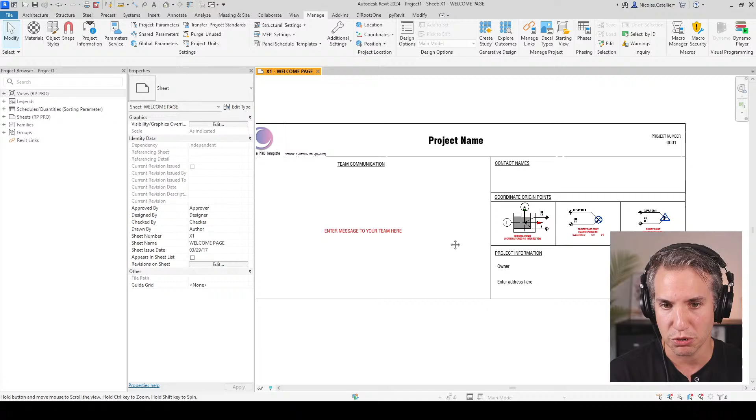So I'm going to switch between the slides to Revit. This is a Revit project that I've just created by using the Pro template. This is the first sheet that you will see. So I'm assuming most of you know, but there's a tool over here that is the starting view.

And if I use this, I set it to sheet X1. I use kind of a random sheet number, X, and it's called welcome page. This contains the project name, the project number. You can write a message to your team. You can include many other things as well. But something interesting that is quite unique to the Pro template, and something you should consider...

I don't know about you, but coordinates can be extremely confusing, isn't it? Everything I've written about coordinates has been among the most popular content on Revit Pure website. And I realized people are really confused and they don't know where the points are. They don't know where the points should be.

So what I've done, I've created a view for each of the main coordinate origin points. There's the internal origin over there, the project base point, and the survey point. I'm not going to explain the difference between all of these points. You can search for it on Revit Pure website or on YouTube. You will find some content I did in the past that's going to get into it.

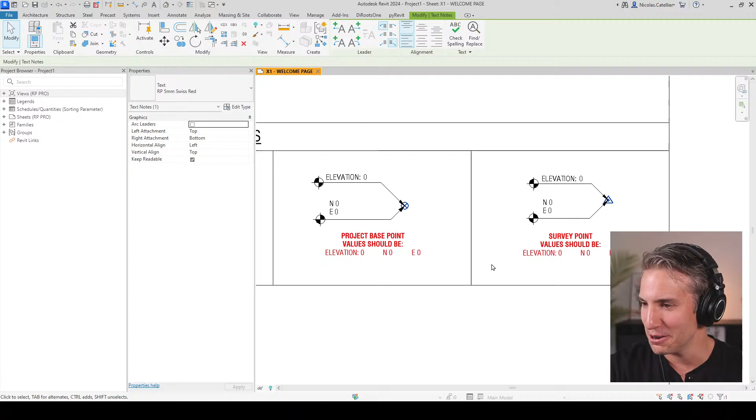But in this case, I write a text explaining where the point should be. In this case, the internal origin should be located at grid A and 1 intersection. And there I can see that the internal origin is at the correct place.

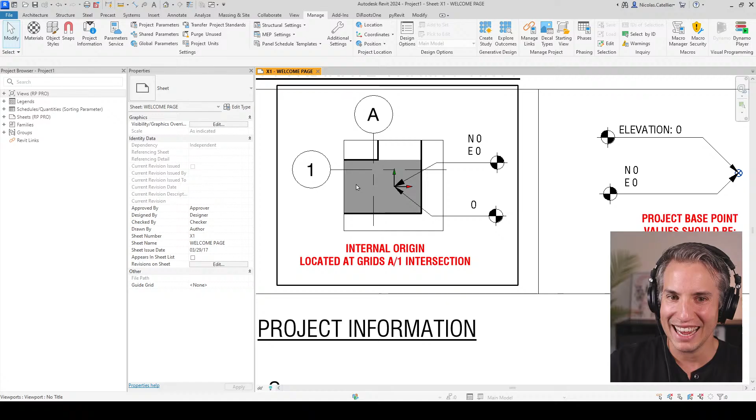So, for instance, if I was to open the project and I would see something like this, it would mean there's something wrong because the red text indicates the position that should be, but the view indicates something else. So to me, as a BIM manager, that would be a red flag that something is going on with the coordinates, and maybe somebody moved the grids or the project has been moved away, something like that. In theory, the internal origin cannot be moved.

When it comes to the project base point, same thing. So I indicate the values that should be 0, 0, 0, and same thing for the survey point. So these are just views to keep track of the coordinate points in the project, because it's very easy—people are not sure where it should be placed. And also for me, it's a reminder to people, hey, think about this. You need to think about where these points should be.

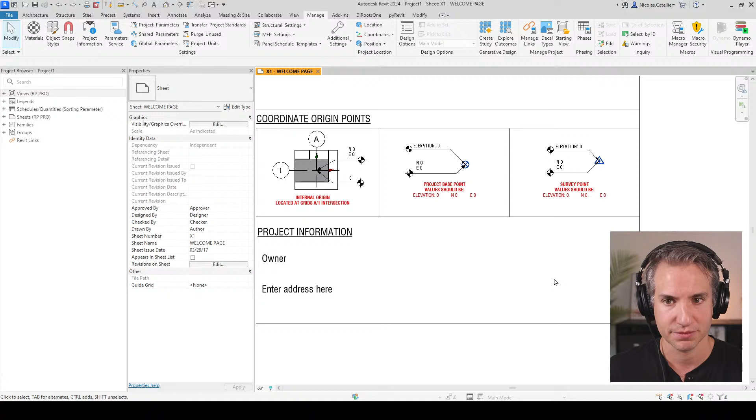For those who don't know, typically the internal origin is going to be—if you link a CAD file, for example—this is going to be used as the 0, 0, 0 origin for the CAD, by default at least.

A few comments about the origin, but sometimes grids move as part of design. How do you deal with that? That's a good point, Ermin - you have to take that into consideration. If that's the case, I would just say that the BIM manager needs to be aware that maybe the internal origin is not at the exact same position as it used to be, and then you can update the text. But the point is that people know where the point is and where it should be. That's just knowledge, and it's the most important part. If the internal origin is not exactly the grid intersection, maybe it's not a big deal, but people should at least know it, so if they export or try to link files together, they won't have any bad surprises.

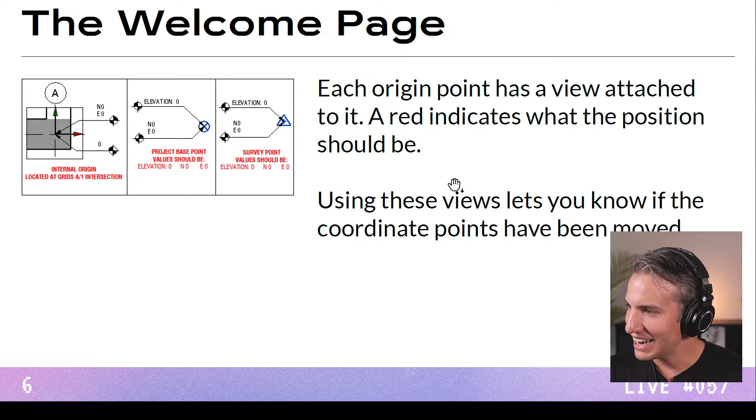I have a lot to cover. Okay, so one of the main topics I wanted to talk about is the project browser. There are so many ways you can organize the project browser. I would say one of the most common techniques is to have an organizing parameter. I know a lot of firms are working this way, and this is the way that we've used to work at the firms I used to work with, by using an organizing parameter.

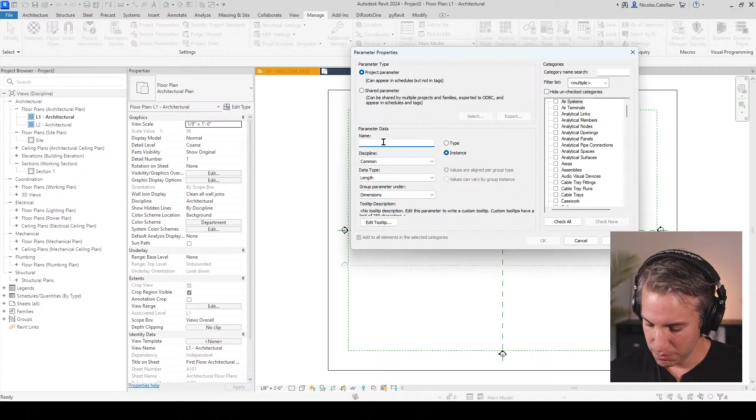Let me explain what I mean exactly by that. So if I create a new Revit project, in this case I might use the default Autodesk template, the new one that they've released with Revit 2024. Let's say that I want to organize the views differently. I can go to the Manage tab, go to Project Parameters, create a new parameter, and I'll call it Sorting Parameter - you could call it something else. And then I will include the views, and it's going to be by instance.

And then each view in the project will have this sorting parameter, and I recommend typing a number. So for example, here I can type in 01 for CDs. You can have concept, you can have worksheets. You can decide how you want to name them.

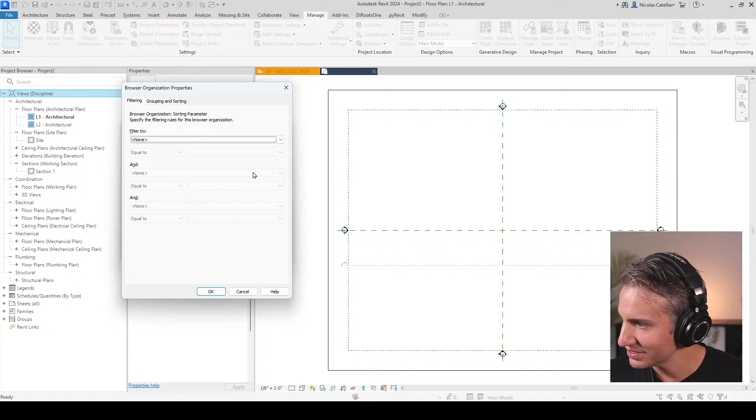And then I have to right click over here and select browser organization, and I will create a new scheme to apply to the project browser by clicking on new. I will call this sorting parameter. And then ignore filtering - if you use any filtering, it means some of the views in the project will not be visible in there. And here in grouping and sorting, I will group by the sorting parameter, and then I will use family and type, and I will click on OK.

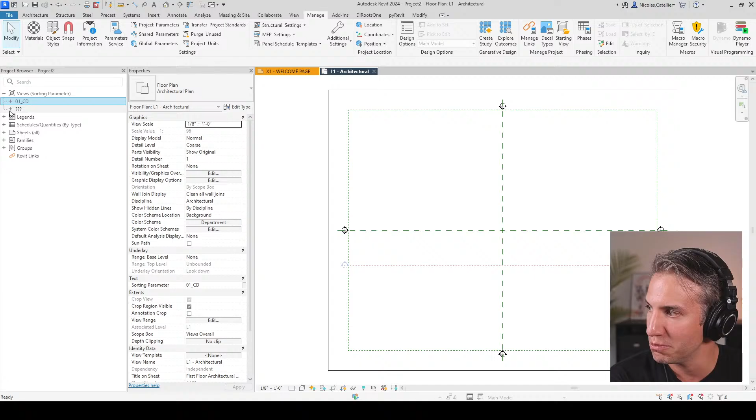And then when you're finished, make sure to check the box to include the sorting parameter. So you can see what happens - the views that I've added the sorting parameters to are correctly classified in 01, CD. However, any views that are not correctly classified are going to be in the question marks, which quite frankly can be pretty annoying. But this can be solved by using view templates that you assign to the views, and automatically the sorting parameters will be correct, and you should avoid most of the question marks. But in my experience, by using this sorting scheme, I always ended up having question marks, which is extremely annoying.

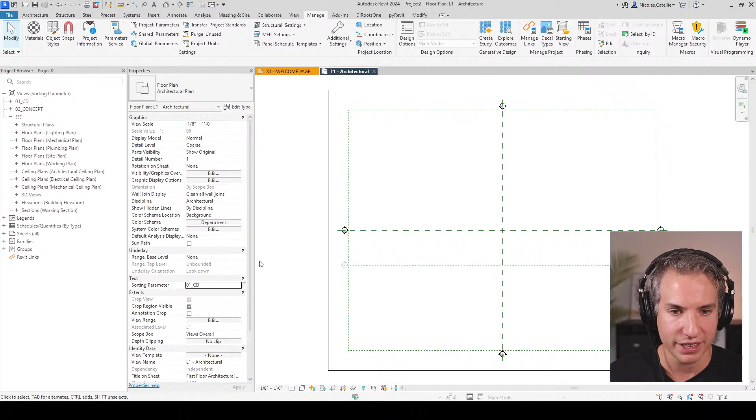But anyway, anytime I would change the sorting parameter to something else, let's say this is 02 concept - I recommend using numbers so that they're placed in the order that you want. You see that they're now classified like this. So this is a decent way of doing it. I know a lot of firms are using this. You can add multiple sorting parameters, especially for bigger firms that might have multiple disciplines. You can organize quite a lot with this.

So this is one way to organize, but I am proposing to you the way I do it in the Revit Pure Pro template is different. I've experimented so much to find a great way to organize the views in the project browser.

And the different way is using the view types. What that means is that each view in Revit has a view type assigned.

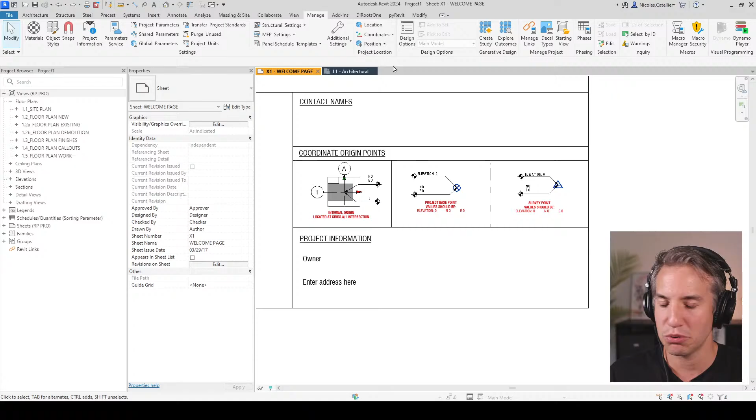So going back to Revit, you can see this is the Pro template, already created. But if I use the default Revit template, you can see that floor plan has multiple views. For example, this one is called architectural plan, so I can switch to lighting plan, mechanical plan, plumbing. But the way I've decided to do it in the Pro template, in this version, only has views for architecture, doesn't have electrical and so on.

Let's say I go to this and click on the drop-down menu. You can see every single kind of view I've created in the project browser. To accomplish this, you select one of the views, click on edit type like you would for a family, click on duplicate, and you can create a new type of view. This one is going to be called 1.8 test plan, and I use the number for the order that I want the views to be organized.

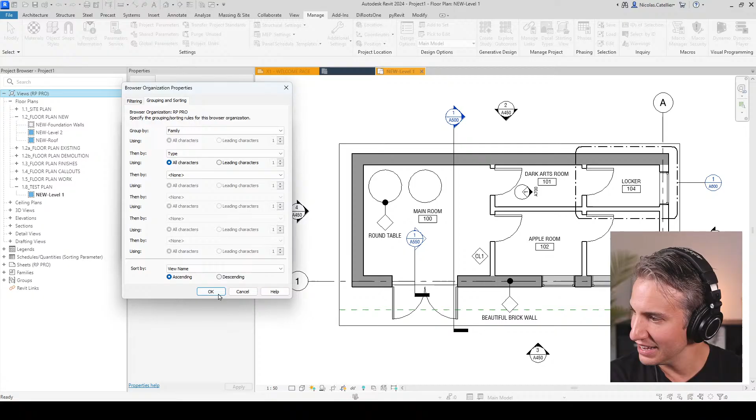Like this, you can see this view is added to 1.8. If I go to the project browser organization scheme, it's called RP Pro, and I click on edit, I go to grouping and sorting. The way I sort views, first you set it by family, then by type. That creates this result where the first level is floor plans, ceiling plans, 3D views, elevations, sections, detail views, and drafting views. The second level is the type, so the different categories of plans, for example.

I've experimented so much with different ways of organizing the project browser, and this is by far my favorite method. There are never any question marks. It works very well, and there are other advantages as well that I'm going to show. I'll be curious in the comments how you organize your project browser, and if you think this could work for you.

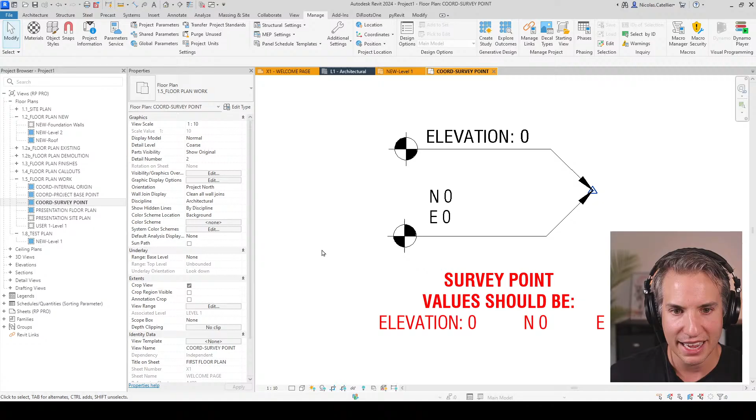So it was a question about the welcome page. Yes, each of these are views. For example, they are classified in 1.5 work. You can see there are views called coord - coord internal origin, coord project base point, and coord survey point, where only this element is visible and everything else is turned off. It's just kind of a view to track these specific points.

Also, the point of this, if I send my model to a consultant, like an engineer, they can open the model and with the welcome page, they'll know immediately where my points are placed. They don't have to mess around to find the points.

Yeah, so a lot of people mention using sorting parameters already coded in all view templates, view types needed. Yeah, that's definitely a good way. If you're going to use the technique, the sorting parameter, you absolutely need to use view templates, else you're going to have question marks. But even then, with my experience, you just need one user that might remove the view template and you will still get those pesky question marks.

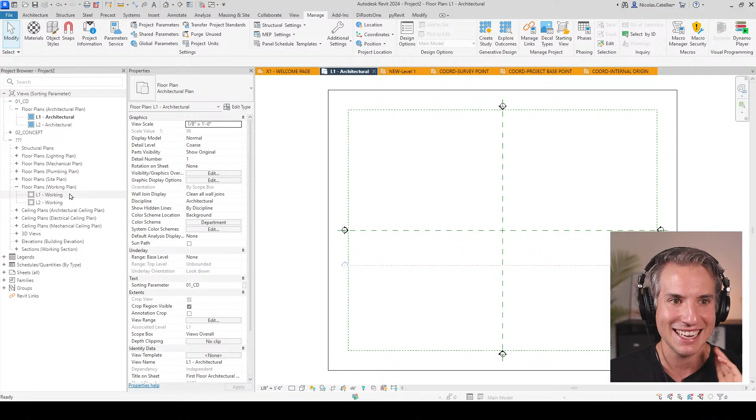So if you think you can avoid them and it's working well for you, I've seen many firms use this technique and it's great, so you don't have to change the way you're working. But if you haven't considered it, I would say personally, the view type technique works really well. Highly recommended.

All right, so you can see all of the views placed. I've created types for every kind. I'm going to talk about phasing later. So there are never any question marks in this.

And something else that I really like about this is that any working views - so if John creates a temporary view to work on the model - the workflow is to place it on 1.5 floor plan work, where all temporary views or work views that are not meant to be placed on the sheet can be placed there.

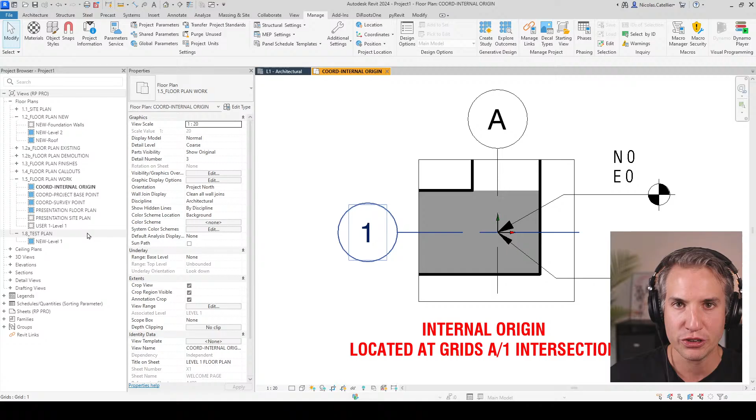And so I usually recommend that the users should type their name as well in the view name, so we can know if it's an important view. And I think it's in Revit 2023 that they introduced this icon to know if it's placed on the sheet or not. It's easy to know, when you clean a model, if you can delete the view or not.

Okay, now let's talk about organizing sheets. Going back over here.

So the way that I do it, and I recommend, typically, at least as an architect, I might have a set of plans for the CDs, execution documents, and then I might have another set of plans for the city, for example, for permitting, or where I might have a colored elevation or a colored plan view. And these typically are placed in C - I like to use the C letter. And everything that is internal will be placed in X.

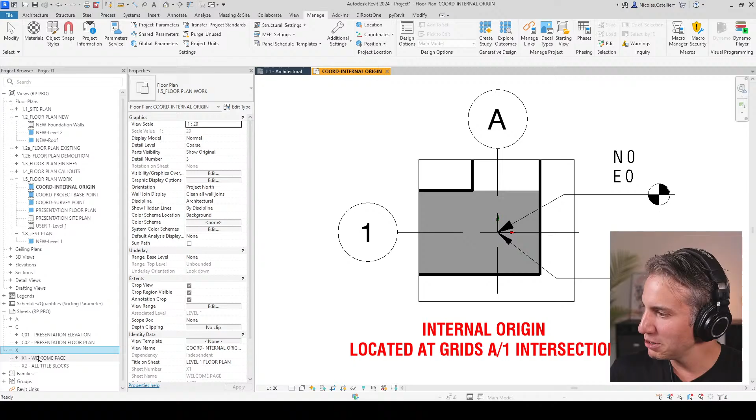In this case, I have the welcome page, and I also have a sheet where all the title blocks are placed so I can visualize them. So this is all internal. You could have additional sheets as well. And everything in C, let's have a look. For example, I have a presentation elevation and a presentation floor plan, in letter format or 11 by 17 probably, so more meant for presentation than CDs.

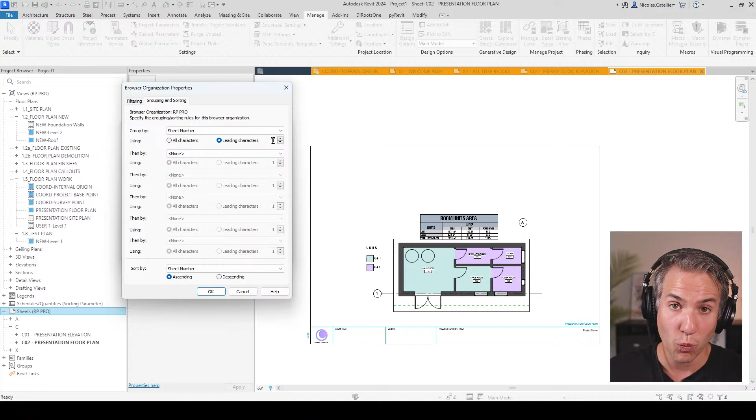And the way the project browser is organized, let's go to sheets, let's edit this. I'm using the sheet number, but with this trick of activating the box that says leading character, and I set it to 1. This means it will use the first character of the sheet number, so in this case it's A, C, or X, and it's going to group the sheets by that, then in ascending order. So if I go over here, you can see all the sheets in A, all the sheets in C, and all the sheets in X.

This avoids me - I know another popular technique is using, again, a sorting parameter. But if you don't have a sorting parameter for one of the sheets, you're going to get those pesky question marks that are so annoying. So once again, for this, I recommend using the leading characters number 1 to organize your sheets.

Having a look at the chat: do you have any option to solve the broken leader after export to AutoCAD? I don't know about this. If anyone has a solution for this, let me know.

Do you assign view templates to new views with your view types? Yes, we're coming to that soon.

All right, now let's talk about schedules. So far I said that I don't like sorting parameters that much. Schedules are the exception. For schedules, I didn't really find a better way of doing it. And usually there are fewer schedules than there are views, so it's not that big of a deal, and it works pretty well to use a sorting parameter.

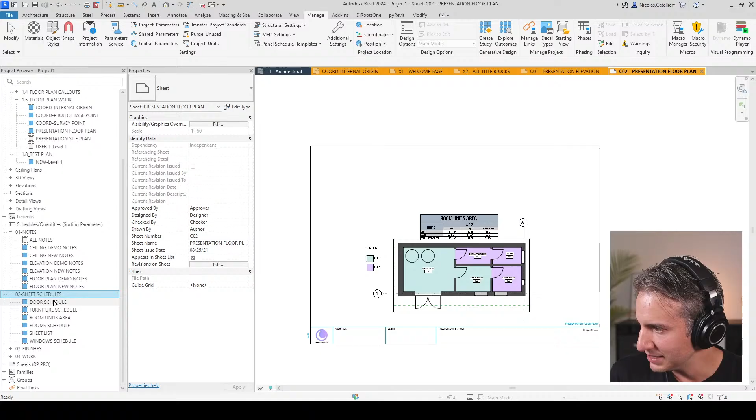In this case, you can see the 4 categories that I've organized: I have notes for all the plan notes that I have, I have sheet schedules - schedules that are meant to be placed on sheets, like the door schedule, the furniture schedule, and so on - then I have the finishes, including the exterior finish legend and the interior finish legend as well. If we have some time, we can come back to explain the way I create these. These are material takeoffs that I use as legends for the project.

And then number 4 are the work schedules. So what is a work schedule? A work schedule is a schedule that is not meant to be placed on a sheet. It's meant to be kept internally.

You can see a live session I did with Purvi Irwin, I think it's episode number 4, where she discussed this - I got really inspired by what she did.

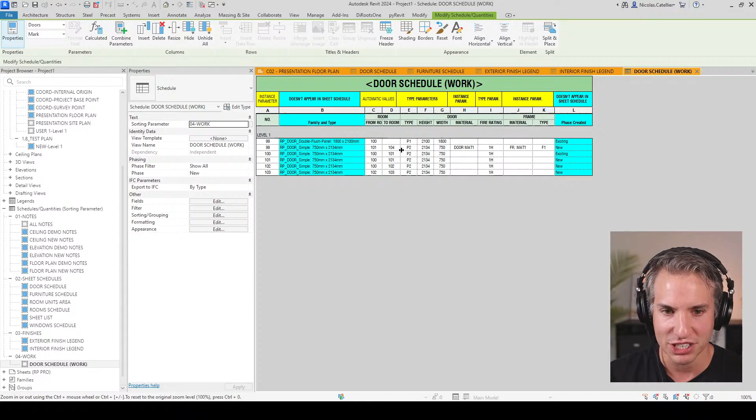The idea is everything in blue here, all the columns in blue, are only internal. So if I was to go to the door schedule as it's placed on the sheet, you can see that these specific columns don't appear. It's just for internal use, maybe for quality control, to verify that the model is healthy and nothing is wrong.

And so once again, if I check the browser organization for the schedules, I am using the sorting parameter, which I've mentioned I don't like using very much for views and sheets, but for schedules it works pretty great, I would say.

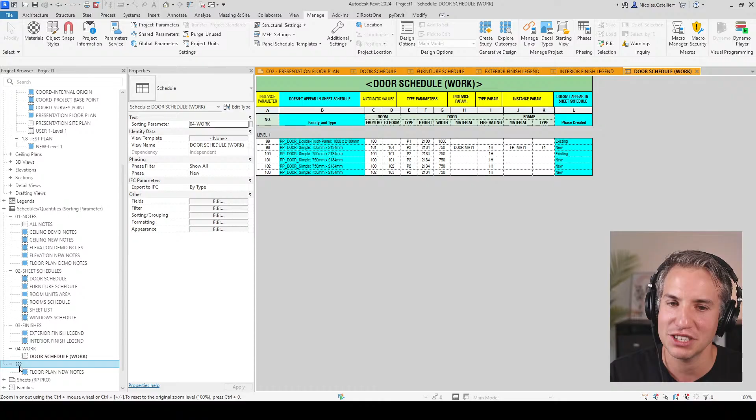Maybe you will still get these question marks - for example, if I remove the sorting parameter, I do get these annoying question marks. But schedules, you typically - yeah, you can have a lot of schedules, but typically it's a little easier to classify and fix this than on views, where there can be so many views.

A comment from Joshua says: remember that episode I implemented working schedules in our template after that stream. Yes, Purvi is so good with schedules, so many good tricks from her. I recommend checking out episode number 4.

All right, let's keep going.

It's really important to set up naming standards for your views and to include it in your BIM protocol. I could do a whole other episode about how to create a great BIM protocol PDF document, or these days it can be online using tools such as Notion, SharePoint, whatever cloud tool you're using.

I really like to name the views in a consistent way. For example, floor plans new will just be the name of the level. Then existing, I'll add prefix EX with a dash, demolition DEM with a dash. And the 3D views, I usually have a number, then dash 3D, then a description. So I have that for every single view in the project.

If I go back to the Revit project, you can see the way views are named. Let me open all of this. There's a very consistent way of naming.

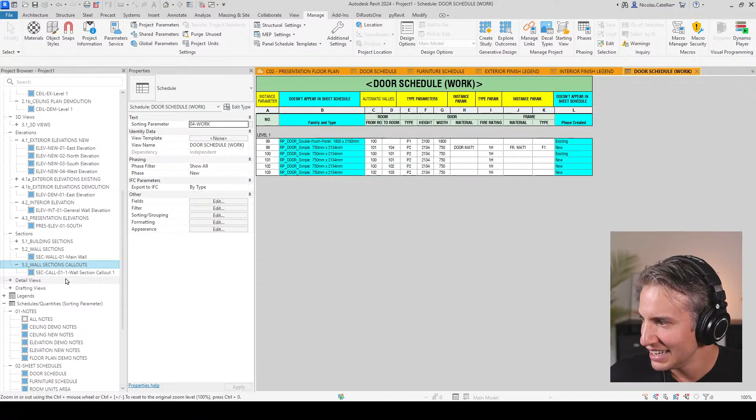For example, ceiling will have CEIL dash, and then the phasing: new, existing, or dem. Same thing for the elevation. And for example, if I'm going to the detailing, I have my wall sections, which are SEC-wall01. And if this is a callout that has been created from this one, I would call it 01-1, referring to the main wall section. Anyway, it's really important to think deeply about how to organize your project browser.

I did post a meme on LinkedIn about it. Do I have it? Let me show you.

Because I'm sure many of you have opened Revit projects, had a look at the project browser, and thought, what the hell is going on? It's impossible to find what you're looking for. And to me, when I open a project and see a messy project browser, it's the first sign that something is really wrong with the model, and it's probably not very well managed.

Let me show you that little meme over here. There you go. I'm sure many of you saw that, like copy one, copy one, copy one, copy one. I even saw people creating new view types with completely bogus titles, such as fake ceilings for tags, or don't delete, or don't use, or anything like that. This doesn't seem to be very well thought out.

To be honest, I did have one project where I remember losing control a little bit, and very quickly it's like weeds: if you don't take care of it quickly enough, you can completely lose control. Two weeks later, the entire project is like this. So if you have your project browser in order in the first place, things are much more likely to go well for you. So think about this.

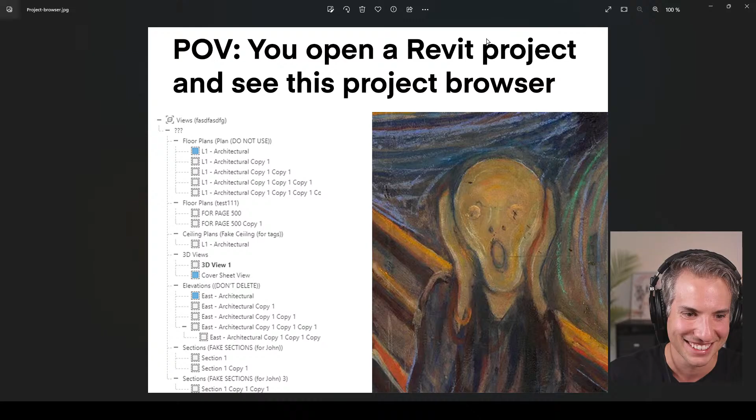I'm sure all of you saw something like that at some point, right? So yeah, is there anything else for the project browser?

Not necessarily project browser per se, but let's scroll down. Also, naming families is extremely important. Let's open a few of them. So I have a code, typically the name of the company. In this case, RP for Revit Pure, underscore PRL for profile. Each kind of family has a 3-letter code, so PRL for profile, underscore again, then a short description of the family using a dash.

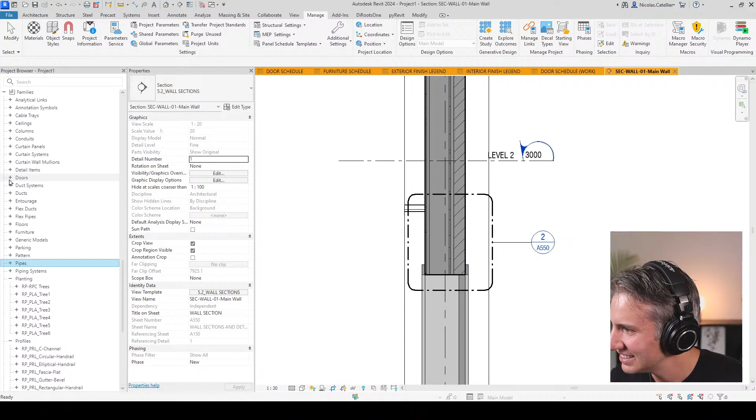I don't like seeing spaces in my family names. Every single time, I'm sure it's possible in the template—there are a couple with spaces, or maybe not. So you can see, 3-letter codes; it can be 4 sometimes for doors, and that's not a big deal, or 2 letters in the case of detailing.

So try to think of a naming convention, or if you do get this template, you can just reuse the system.

I'll have a quick look at the chat. There's a lot of questions, so it's possible—sorry if I don't get to answer all of them.

Always go from general to detail. This applies from family naming to material naming.

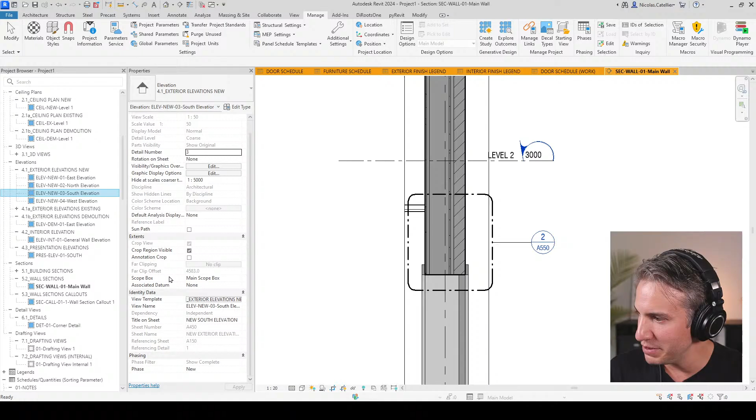William asks, why is it important to name the reference view to where it's coming from if that information is already shown in the properties? William, that's a great question. I like that you can get a glimpse of the project just by looking at the project browser, even without clicking into the view itself. That's why, for example, I like to type 'new' in the name of the view, even though people could look at the phase and determine by themselves if it's new, existing, or demo. But to me, I like that you can look at the project browser and know immediately what's going on. So I know I can look at this callout and know it has been created from this section, if users did their job properly.

Agustina said the first copy one sets the tone and opens the door for more copy ones to come. Yeah, sure. Like if you start to have copy one, it's like weeds, and more are going to come in the project.

Are you using the number at the beginning of your view type for your sheet nomenclature? No, the number at the beginning of the view type is there because I want the views to be ordered properly. Since it's in ascending order, 2.1 is first, 2.1a is second, and 2.1b is third. So I typically want the new to be first, the existing after, and the demolition last. The numbering allows me to control exactly the order things show up in.

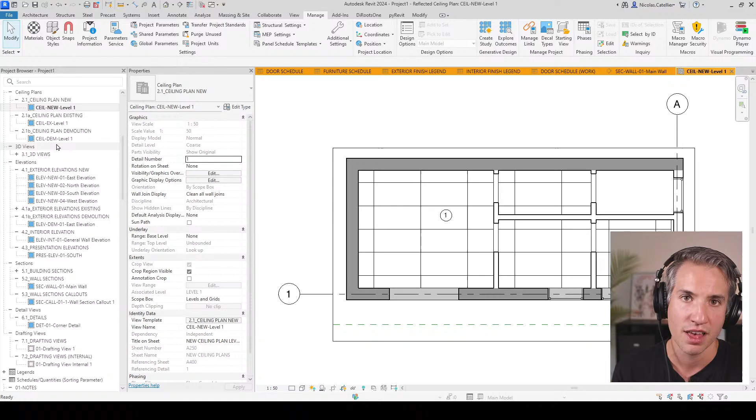Tintalk asks why spaces are wrong. I think it's not that big of a deal today. It comes from very old standards where having spaces could potentially create problems, so I've always kept that in mind. Honestly, maybe someone else could answer better, maybe it's just an OCD thing to not have spaces in family names. All right, let's keep going.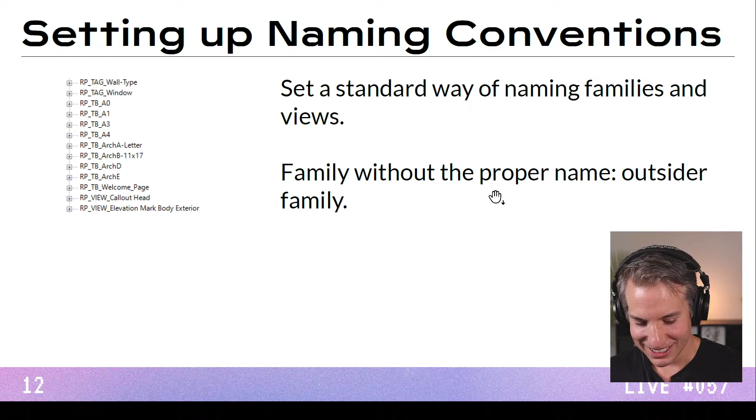I deliberately started with the project browser because to me it's the base. Often when I see a project that's disorganized, it's because the project browser is a mess and they didn't have a good system to start with. If you have that, chances are on your side, and of course you need to do maintenance and explain to users how to use it. The view types, for me, are kind of self-explanatory, you don't have that much explaining to do.

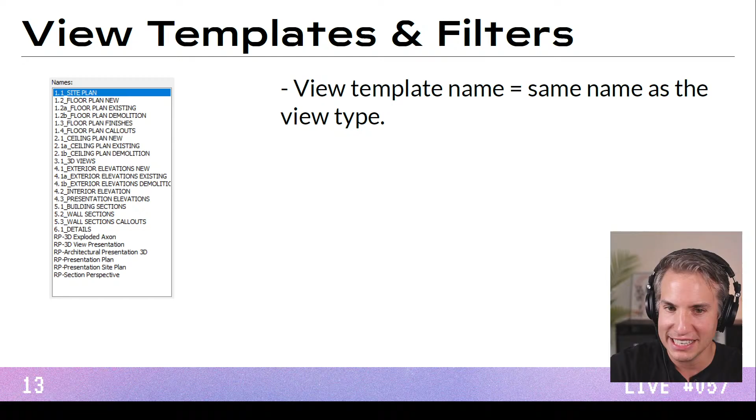Okay, now let's talk about view templates and filters. What I like about the view type technique is that I use the exact same name as the view types for the view templates, with a few exceptions at the bottom. But for the CDs, construction documents, it's the exact same name. Let me show you exactly what I mean by that.

Let's say that I have ceiling new level 1, and you can see that the view template name is exactly the same, same number. To me it's extremely simple: this view type, 2.1b ceiling plan demolition, has this view template assigned, and that's it. So users won't be confused.

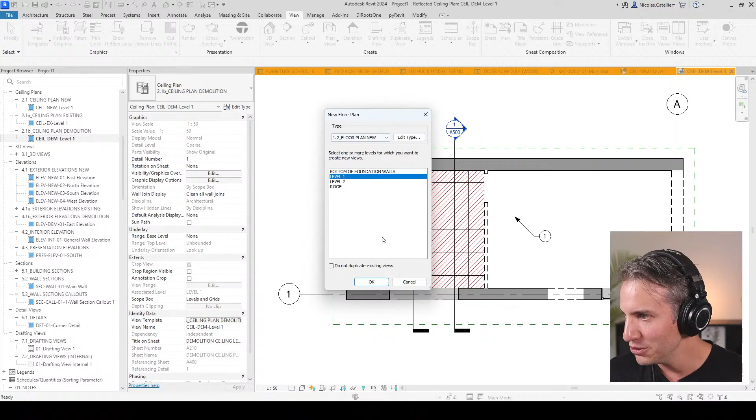So which view template should go with each view type? It's super simple. If I create a new plan view from level 1, and I use existing, which one should I use? Well, let's say demolition.

So it's been created here, and you can see automatically the correct view template has been assigned, with the exact same name as the view type. I'm just a fan of simplicity generally speaking, I like how simple it is to have a view type and the view template with the exact same name.

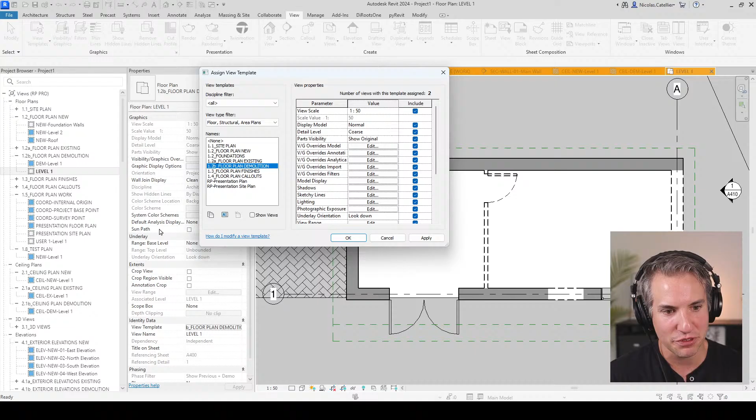Having a look at the chat, many people are explaining why to avoid spaces in naming conventions. For example, Nicholas Wright says BIM 360 doc folders will not be accessible if you include a space at the end of the name. Interesting. Yeah, I think it's just good practice. Me too, I've heard it's very specific circumstances that could cause a bug, but just because of that, it's good practice to avoid it in the first place.

Okay, so that's for the view templates, at least how to name them. Now let's talk about filters. Filters are powerful and often underused from what I see in a lot of templates, and that's the difference between an amazing template and an okay one.

So these are the filters that I have for my main floor plan view. I mostly use filters to make some elements invisible. In this case, I make the demolition views invisible, the site floors invisible, the presentation views—because all these views starting with C, I have a filter so all the C views are not visible in the CD plans—and the finishes for the walls and floors.

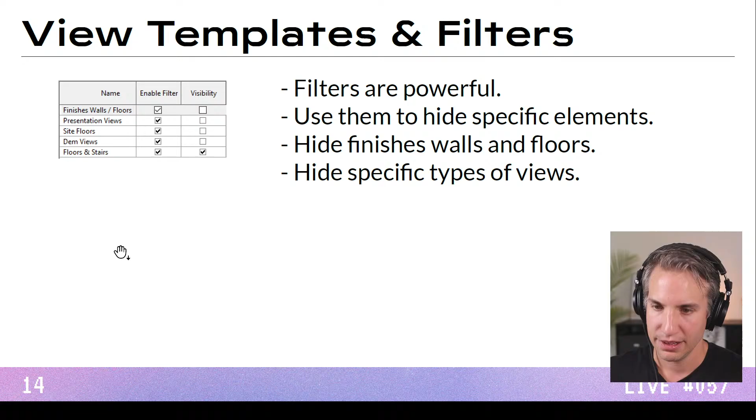Something else that I like to set up in the template is the scope boxes. I try to set them for every single view. I'm assuming most of you have an idea of what a scope box is; if not, I have a pamphlet PDF guide about it and a YouTube tutorial you can search for. We can see in this case I have a couple of scope boxes: this one is called main scope box, and this one is levels and grids.

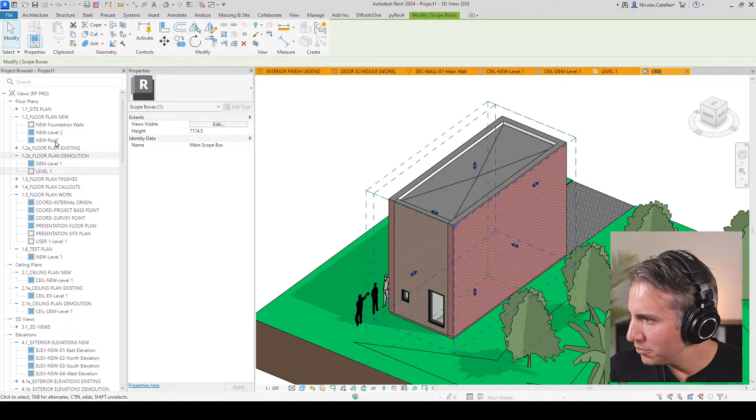So if I go to this one, you can see that the scope box has been assigned. Oh, why is it assigned to level and grid? It should be main scope box perhaps, or maybe levels and grids is fine in this case. If you have multiple views, you don't have to set the crop region every single time, it's automatically assigned to the scope box. You don't have to play around with it.

Tad asks, any reason why your origin is top right of plan? That's a great question, I remember having a few debates about this. Should it be top left, top right, bottom right, bottom left? I'll be curious if you let me know in the chat what you typically use. I've seen differences in all areas. I don't know if there's any norms or standards about this, what does ISO standard say, if it even mentions that.

An interesting comment from Liz Sinclair saying, I recommend using master format numbering for family naming. Yes, that's indeed a potential good way to do it.

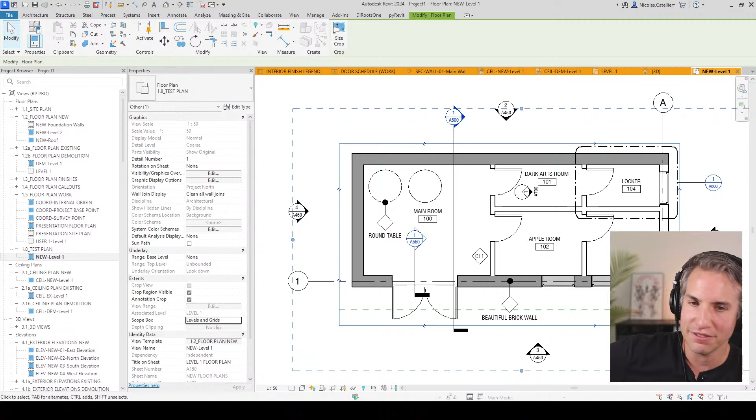Etsane asks, hey Nick, thank you for this presentation, is there the same template for Revit 2023 and 2022? Yes, this one goes back to Revit 2019 if I'm correct, so you have six versions of this template. Only in 2024 will you have access to things like the topo solid that has been placed, maybe a couple of fixes in the most recent version, but the core of it is pretty similar from one version to another.

So some people say bottom right, some people say bottom left for the origin, the grid at top left. So as you can see, everyone has their own way of placing the origin. Pretty interesting, let's keep on going.

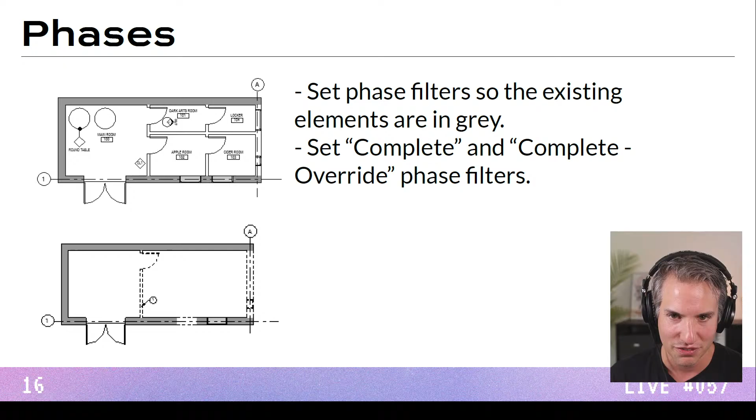Let's talk about phasing. I've been working on so many renovation projects, and it was always about how we organize the project browser for phasing, how we organize the new, the existing, and the demolition views. It turns out that having a view type for new, and a view type for existing and demolition, is the best way to do it. If you're working on a project that's not a renovation, you don't need views for the old phases, you can just select them and delete them and they'll be gone from the project browser.

You can even do a Dynamo script for that. There are some really great Dynamo startup scripts where you select your project type and check the box for renovation or new project, and all the renovation views are automatically deleted. Or you can do it manually, it's not that long either. In this case, we have phases for the floor plans, ceiling plans, and elevations, not really for the wall sections, although that might make sense to add as well.

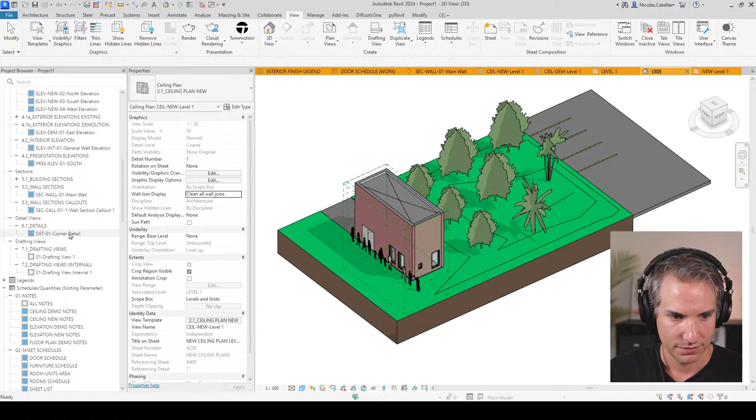Okay, that's for phasing. Now let's talk about the view filters. I don't like the default view filters, the phasing filters from the default template, so I did create my own.

For example, if I go in here, you can see this is an existing view. For some reason I do have some site elements showing up, that's okay. This is what I like existing to show up like, the walls will be shown in a solid gray color, and for example the windows, if it's not cut, I want to use a lighter gray color.

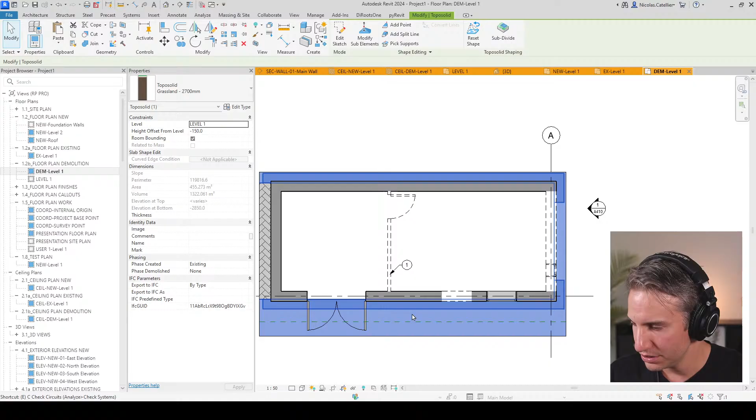Let's go to demolition, this is what I want. Let's hide this, okay, this is what I want my demolition plan to look like, to have nice dash lines and to also have all the existing walls showing up in gray.

And then for the new element, where is my new? Okay, here's my new. I want the existing walls to be shown in gray, solid gray like this, but I want the new elements to show up in white. Again, that's not something that's initially done by default on the default Autodesk template.

So in this one, I had to mess around a lot with the phase filter. Let me show you the phase filtering for this. I'm going to the phase, going to phase filters. So you can see a few examples.

I did create a phase filter called complete no override, for if, let's say, I want everything to show up in white. Let me remove the view template. I can switch from show complete to complete no override, and everything will just show up in white. So I guess it depends, for a renovation project typically I would want to use the other one, but it's possible that for some views you just want everything white like this.

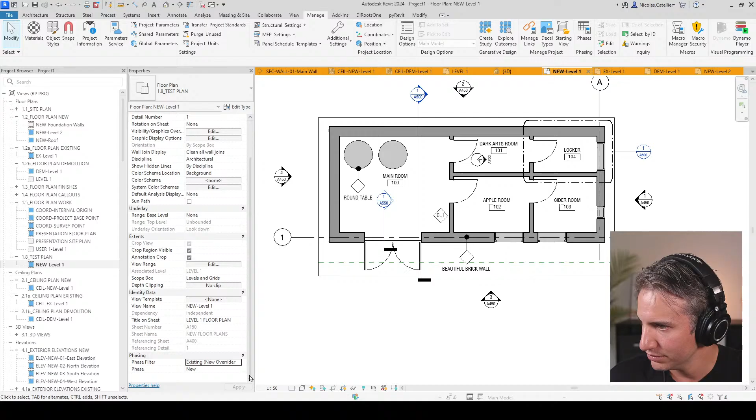If I go to existing, even though we're currently in the new phase, I still want them to show in gray. So I've created a phase filter that is existing new overridden, which means they're new in this phase, but not new in the context of the project.

If I have a look at the graphic overrides, I just have these cut patterns. And by the way, the cut patterns, the solid fill, I always place it in the background. So if there's a color in the foreground, a pattern, it's still going to show up.

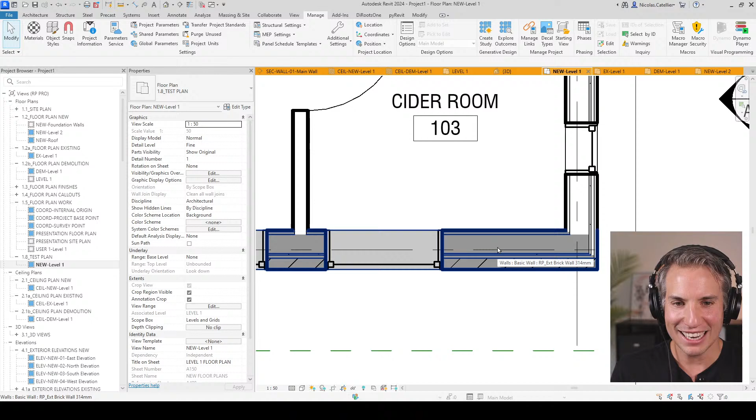Let me go back to this one. Is this a generic wall? Let me switch the level of detail to fine. This has been possible only since Revit 2019, by the way, but you can see all the layers of the walls with a gray background anyway, which you couldn't do in the past.

You had to manually draw a filled region, which was extremely boring, but now this is automatic. Just make sure to set override in the background and no override in the foreground.

I'm talking about the phasing over here. By the way, if you look on YouTube, I have another session where I geek out about phasing stuff like this, so I'm not going to go too deep into it now. Just know that I talked a lot about the best way to organize it.

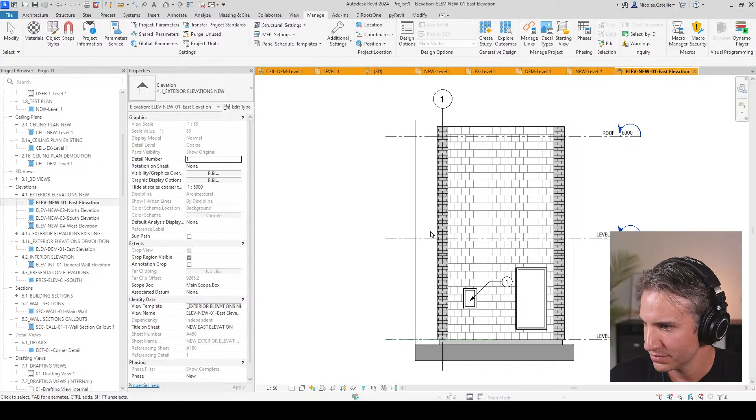If I look at the elevation as well, pretty much the same concept. For example, this is a new wall, so it's showing in white, but the brick walls are existing, so they're showing in gray. And existing elements, for example this window, are going to be showing up in dashed lines.

Okay, I would set the existing cut and project line as dark gray, so you differentiate between new and existing.

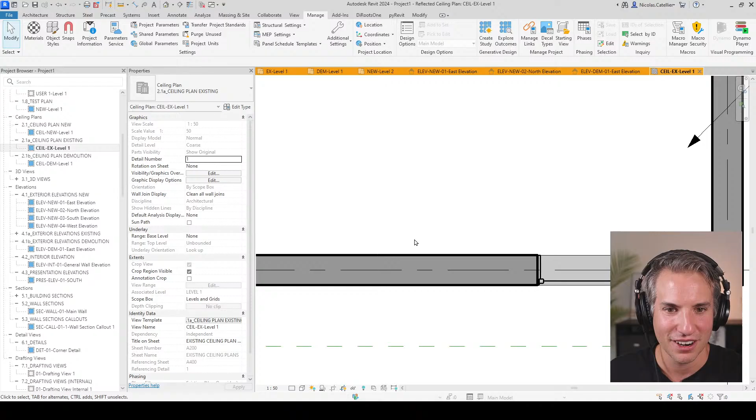Yeah, I don't know why, but I don't like when lines are a different color. It just looks weird to me, but to each their own, of course. So a solid gray is fine to me, I think this is pretty clear. I just like my black lines for the elements. But that's possible, maybe it looked good in the end. I like the way it looks.

By the way, in the Pro template, I've also played with the line weights. Something that could be controversial is I use the exact same thickness for all scales, which means I could basically delete the scale if I'm doing that anyway. Typically you'd have different thickness at different scale, but something I do like is knowing that line number 1 is going to be 0.1 millimeters anyway, regardless of the view scale. That's just something I enjoy, knowing that the thickness is the same everywhere.

Some people might say, well, in detailing, that's not enough, we want things to be a bit thicker. Yeah, all good, but I've played around with it and I've come to this one.

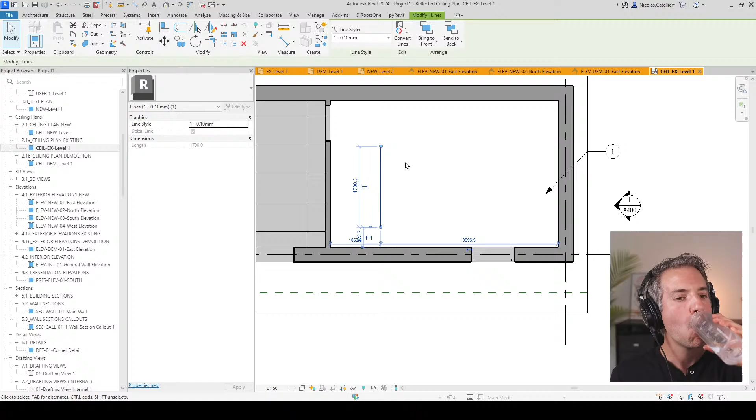So there are good discussions. Yes, CoreDX says you can delete all of the view scales. That's right, yeah, that's right. If you are going to use the same for all, you could just delete them and keep one scale. I think I kept them all so people could see it and could make changes if they wanted to.

There are discussions about phase mapping. Yeah, of course, if you have models from consultants, you need to do phase mapping. Again, I think it's something I talked about in the live session I did specifically about phasing. All right, let's keep on going.

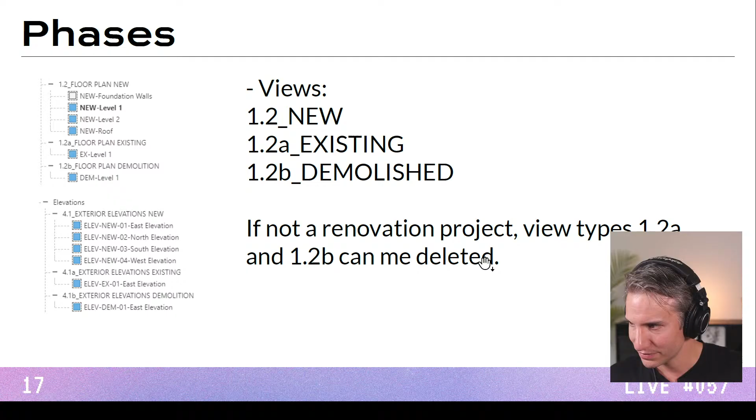Like naming the views, I will use the same number but add a letter to indicate existing or demolished: A for existing, B for demolished, and no letter for new. And if it's not a renovation project, you can just get rid of this.

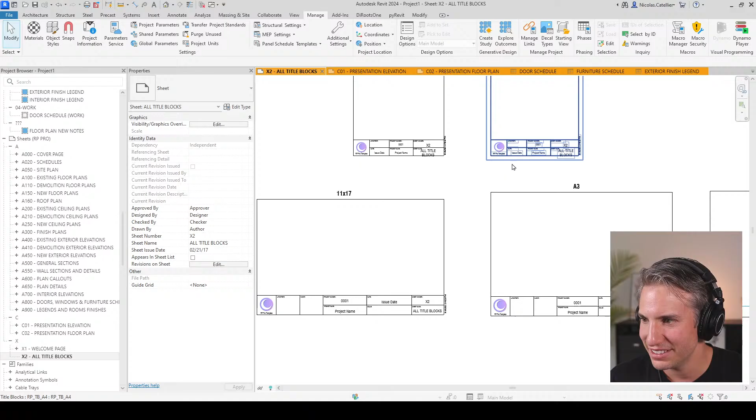Title blocks. Yeah, I do like to have my sheet over here. Where is it? Where is it? Sheet with all the title blocks placed, so you can see, and that does include both the European sheet sizes and the North American ones, so both letter and the A series.

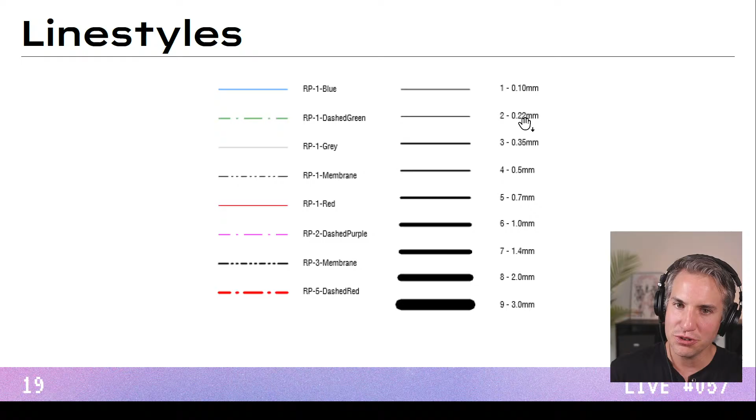Line styles, again, one of the reasons I like to use the same thickness for all scales. I like knowing that line number 2 is 0.22 millimeters. So if I have other line styles, I'll know how thick they are.

And I do actually include in the template, if I go to legends over here, not detailed component, template standard, this view where I include everything, all the components, all the samples, everything, and I have this line style over here. This is the way I name the view.

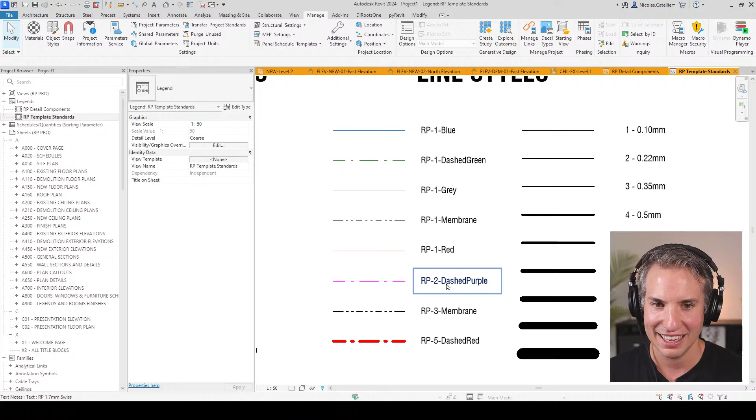First, I add a prefix for the company, RP in this case, dash, could be underscores as well if you want, and then this is the number of the thickness. So I know RP-2-dashed purple, that's the name of the line style. It's going to be a thickness of 0.22 millimeters. This is the best way I found.

If you want to see this in additional settings, line styles, you click on the plus and you can see every single one of them.

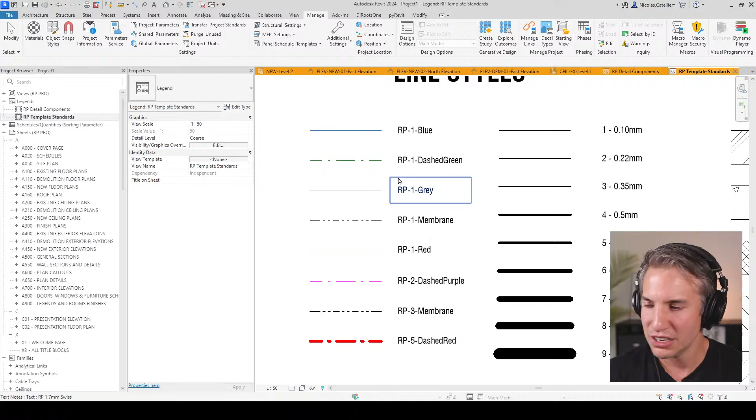The reason I'm using a prefix is because you always get random alien line styles in your project, and I want to know if they should be there or not. Often I will open a project and see a bunch of lines, and often if you've done a bad job, maybe it's because you've exploded a CAD file inside your Revit project and every single layer has a line style created with the same name. So having these lets me know that these are the really important line styles that I should always keep and not delete. Anything else might be a mistake and maybe I can delete them.

Having a look at the chat, people commenting about the title block.

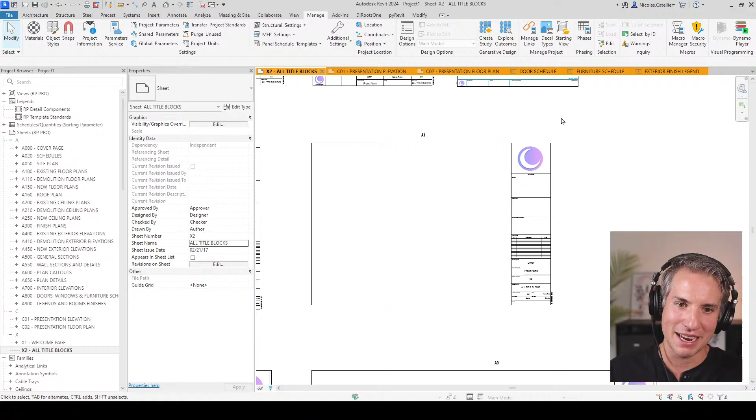As John Pearson mentioned, this X2 sheet, if you purge, indeed you're going to keep them all. They're going to stay inside of the project. In this case, they're all a separate family for all of them. But as someone mentioned in the comments, it could make sense to create one family and make them flex with different types. That doesn't seem to be the case for these.

I've already talked about this earlier. Thanks to Purvy for the idea of having work schedules, as you can see below, just for internal purpose, and sheet schedules where it's going to be placed on sheets. So check out episode number 4 about this.

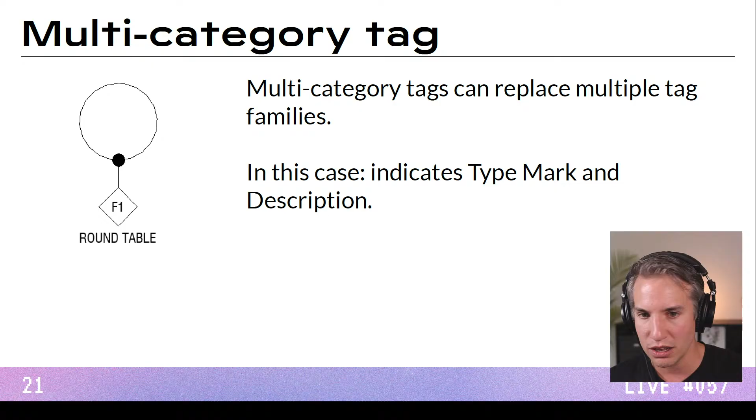Multi-category tag. Something I've realized with a lot of clients is that they have a tag that indicates the type mark for multiple elements, for the walls, for the doors, for lots of things. And I like to have a multi-category tag. So if I go to a floor plan view and go to annotate, I have my multi-category tag over here, and I have just one that has multiple options. Let's say I use type mark, I can click this. This one doesn't have a type mark assigned, it seems like.

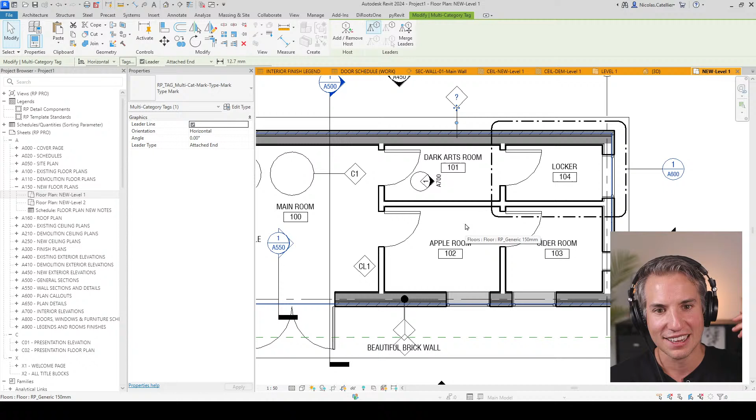But if you're using this symbol, this diamond symbol, I can use this on any elements. It might seem obvious to some of you, but so many people are not using multi-category tags. Instead of having 15 families that are almost exactly the same, you can use multi-category and have just one. You can see I can use this on windows, on walls, on doors. Pretty cool. And with the types, it does contain a few options, like the type comments, for example, that pops up below.

CoverDX says that he uses a multi-category tag for notes. It's always also something that I've done before. Pretty good way of doing it.

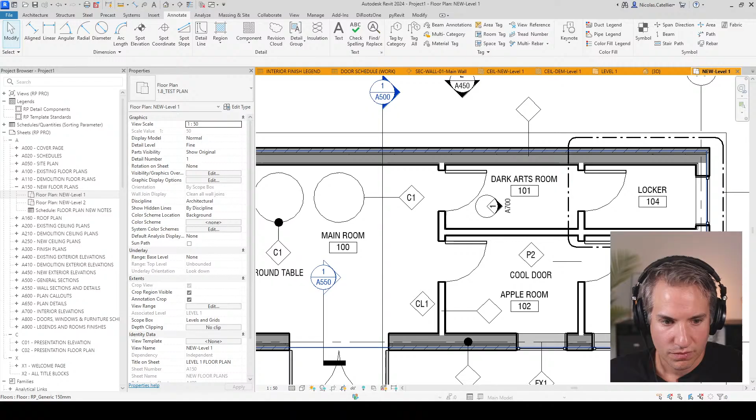Okay, let's keep on going. Getting close to the hour.

A plan note system. I do have a video tutorial about this plan note system. I'm not going to explain the entire principle here, but type plan note in Revit and you should see a Revit Pure video. I think I got originally the idea from Lauren from Team Parallax, who I also had on the show to talk about the landscape at some point.

The idea is to use a symbol family and a note block schedule. Some people might ask, is it better to use this technique, or is it better to use keynotes? It depends. Keynotes are great, I do use them, but the thing I find annoying with keynotes is that you have to tag an element.

You cannot have a keynote that is floating, which is kind of good because it makes sense that you would want to specifically annotate an element that is part of the model, but sometimes you just want to point somewhere and be sure that the note is not going to be deleted if the element is hidden, deleted, or moved by mistake. So I'm going to showcase quickly this note system that I've been using successfully. It has some limitations too. Do I have a note on this?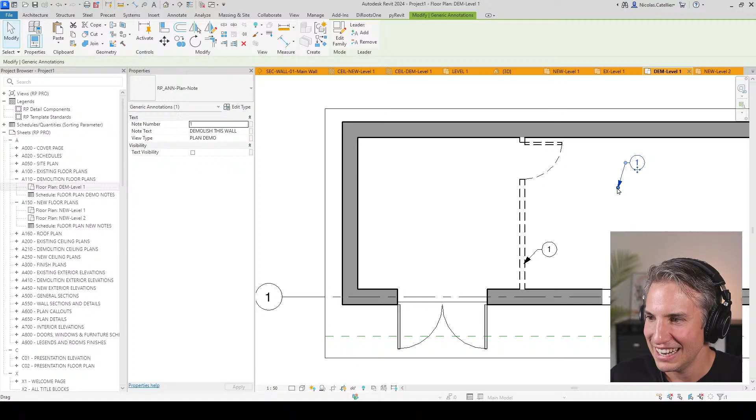Okay, here's a note. So I have this note family. It's a generic annotation, so I can copy and paste this. And this is a floating note, not linked to an element, so I can make it point anywhere. I can change the number to 2, make the text visibility appear, and say demolish the floor. So this is not linked with a text file. This is different from keynotes.

I'm not saying they shouldn't use keynotes. Keynote is great, but this system works well, especially for smaller to medium-sized firms. They can find keynotes a bit intimidating, and they do have some limitations, but this works pretty well.

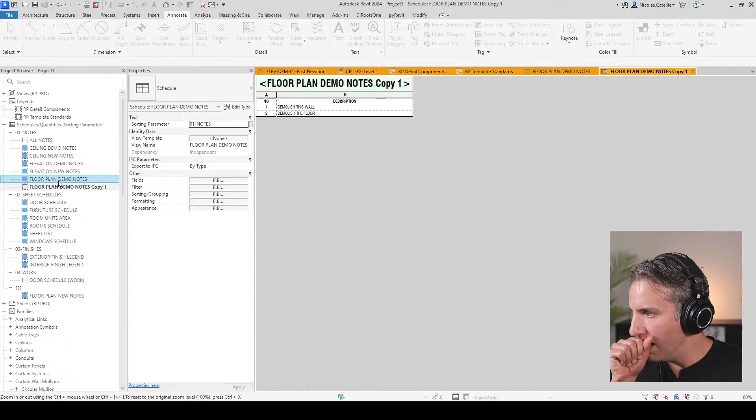And then there's a note block schedule. If I go over here in the notes... okay, there you go. So you have the 2 notes, demolish this wall and demolish the floor. If I go back over here, I have too many views open.

So if I create a third one, it's called demolish random, and I'm going to choose something else too. If I have twice the same note with different text and go back to my little schedule, you can see that number 2 is going to be placed twice. It just means I can set a different number to this one, and it's going to be moved automatically.

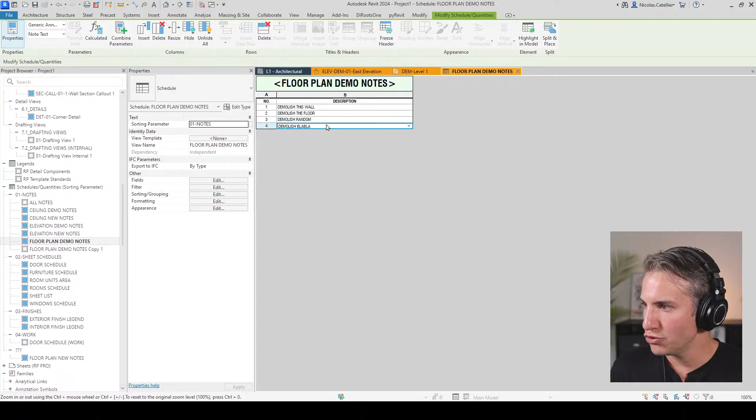And since this is a schedule, you can click on highlight in model, and it's going to show you where this note is placed. If you have multiple notes of the exact same thing, they're grouped together in the schedule. I also have a schedule called all notes, where every single note in the project is placed. You can see the view types, you can see the count, so you know how many notes of this kind have been placed.

Super Silly History asks, will I miss any benefit of Pro 2024 if I only use Revit LT? I think the only thing you'll be missing are the view filters, because for some reason Revit LT doesn't have view filters. I think they might still be applied, but maybe you won't be able to modify them. If there are some Revit LT users who could let me know if that's truly the case or not.

Okay, having a look. People are still debating the space in the file name. That's funny. Hamudi is saying a space in the file name can cause errors when loading a file or transferring files between computers. Common replacements for spaces in the file name are dashes or underscores. Yeah, that's all right, I'm not crazy, right? I've heard this somewhere that spaces are bad in file names, so I've always kept that in mind, and I always name my families without any spaces.

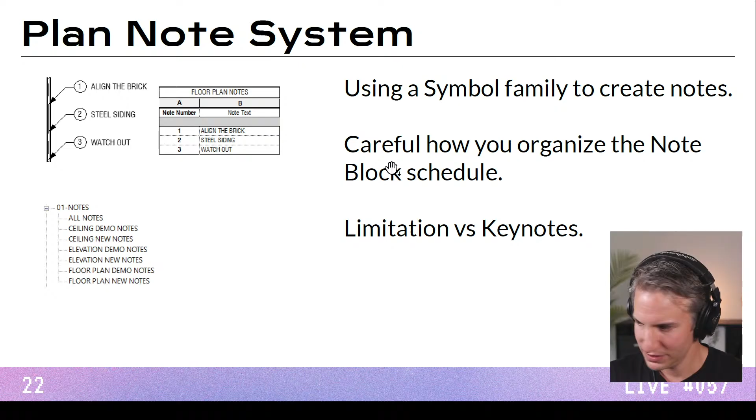So how long do I have to go? I'm almost done here, I'll finish this.

So I released a few years ago a course called Design, and the goal was to use Revit for presentation purposes. And something I did was create these 3 families that are made for plan views.

If I go... where are they? Well, I can go to a 3D view over here. I can go to my site plan and see them all. I think I also have a site plan made for presentation purposes. There you go, I have my presentation site plan over here, and you have these - aren't these gorgeous, these beautiful trees?

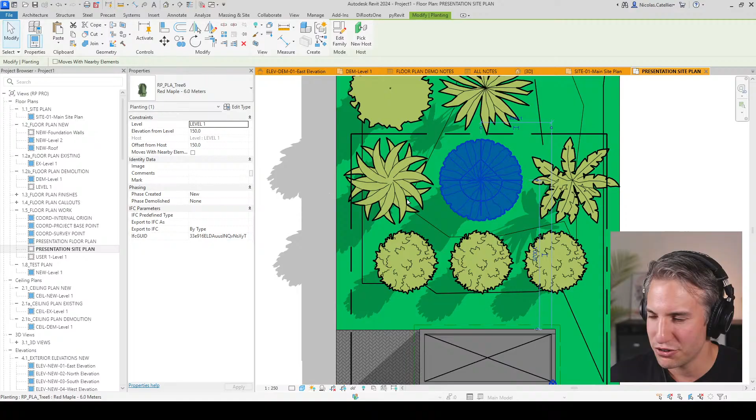And since these are in the planting category, it means that if you edit the type and change the dimension, like this, it scales automatically, which is pretty cool. I think that's unique to the planting family category. So anyway, if you want nice looking trees in Revit, I do have some of them. I think I might have published a tutorial on how to create tree families like this at some point, you can have a look for it.

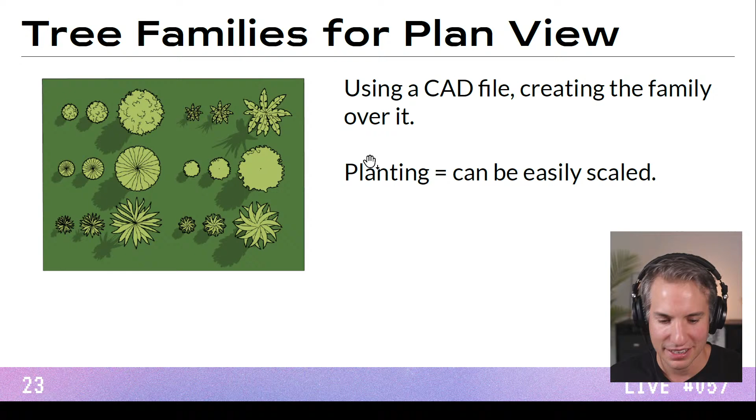But it is made by using a CAD file that is imported into a planting family. And then the template also includes a few presentation view templates.

If I go to the 3D views, where are the 3D views? There we go, over here I have my main 3D view, like this, nothing too special. I also have an exploded axon that is in black and white, but I've set an override so that the line for the explosion - how is that called - displacement path, I guess - is using this kind of dot in orange, so it looks a bit better.

And I also have a template for a section perspective where the walls, floors, and ceiling, everything cut, is shown in dark gray.

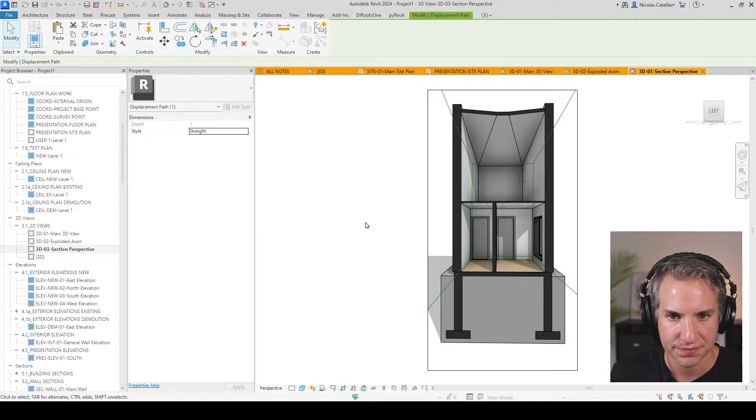So there are a lot of more stuff in this template. Everything I've been trying to build for 10 years has been incorporated into the template.

My goal here is not just to do an infomercial of the Pro template. I wanted to show the principles and the thought process I had when integrating all of these things, so you can totally create it by yourself. If you want to save a bit of time, the Pro template is there for you on the Revit Pure website.

When I work with clients and they ask me for a new template, I always start with this template. If you purchase it, you do have access to the script as well to modify the prefix and the name of the elements. So I'm going to show you how to customize this.

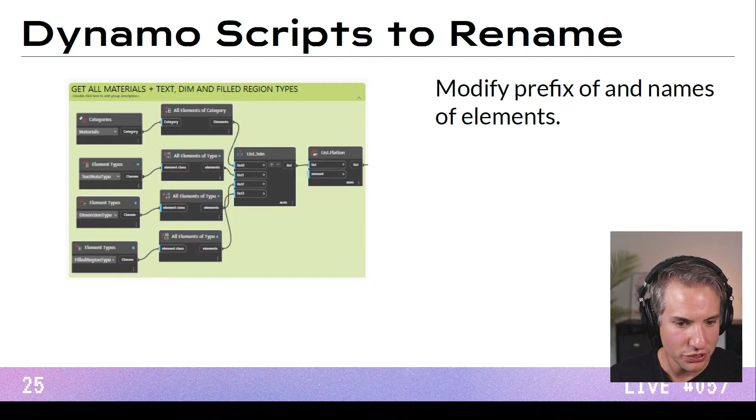Shout out to DiRoots once again. I always mention their plugins, but I will use Family Reviser. DiRoots is a free collection of multiple plugins, and one that I really like is the Family Reviser over here. So I'm opening Family Reviser.

I will go to edit, find and replace RP underscore, and replace by... what's a random company prefix that I should have? Let's say that it is ZZ. So ZZ, and then I'm clicking on find all over here. It's finding all the instances. I hope I'm not crashing it.

Okay, I have all the RP that has been found, and you can click on replace all. You can see for the family name, and then you can do the same thing for a type name, but I would click on apply. I once did this process manually, and it was so boring, so I'm really glad that DiRoots released this plugin.

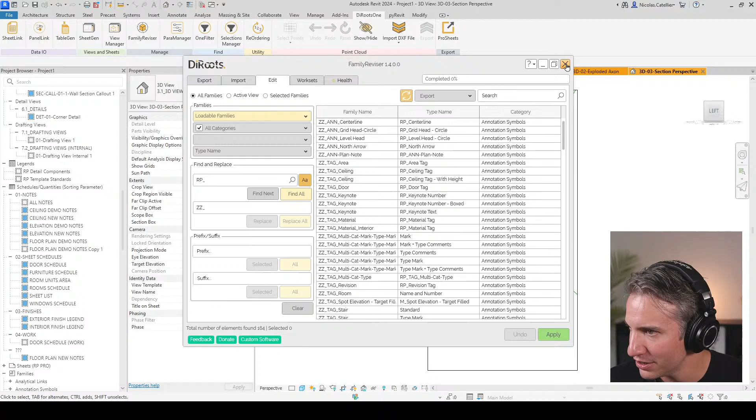So then I would do the same thing here. I can switch from family name to type name. I'm not going to do it to save a bit of time, so I can get out there. But there are some things that are not changed. For example, it doesn't work, at least the old version didn't work on materials. So you can see materials are still RP, but I do have my Dynamo open over here.

This is a script that is provided with the Pro template. It's not very complicated, I'm just basically getting all the materials, the text note, the dimension, and the filled region names. And I saw John was there, so a shout out to John for this node called Element Filter By Name in the Rhythm package.

So this is Revit 2024. I'm hoping that the script works properly. People have been having problems with it. Anyway, so I'm searching for RP, let's say, and I will replace it with ZZ once again, and I will run it. Why does it say Dynamo is not available in the current context? What does it mean?

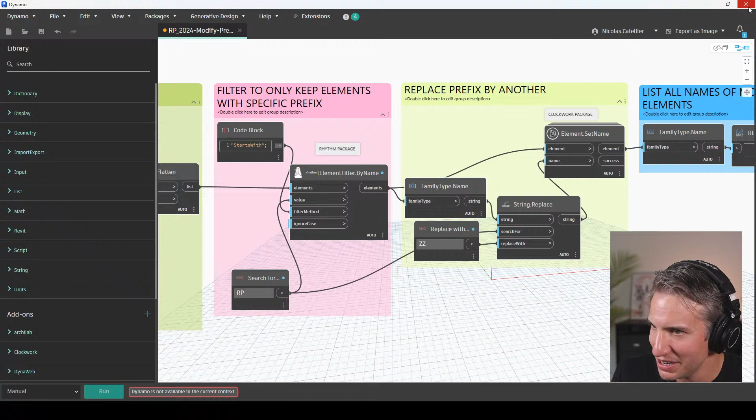Okay, let me just close this, and I will open Dynamo once again then. Okay, let's open this again. Okay, ready to run. There's an exclamation mark here from Clockwork. Is this gonna work? I'm not too sure. I think so, I did check the script a few months ago. So clicking on run.

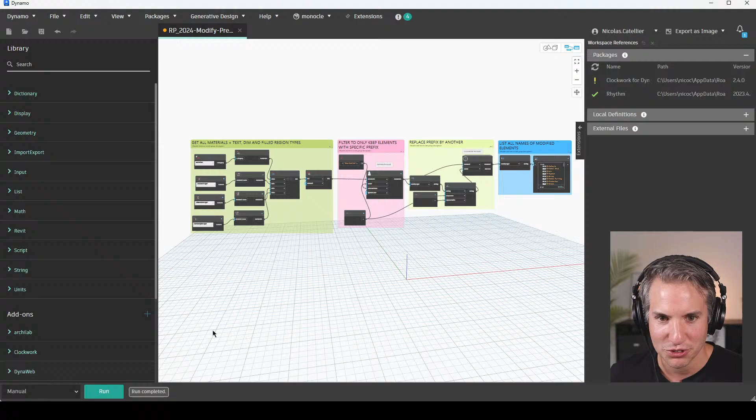Hoping it doesn't crash, you know, with Dynamo you're never too sure, right? Even if I checked the script a couple of months ago, it was fine, but I'm always scared something's gonna go wrong. That's some sort of package... not gonna be right. It seems to have worked. So you can see the list here, all the materials have been renamed. I'm going to go back to the Revit project, going to the materials, and all the materials have been renamed to ZZ instead of RP.

So whenever I work with a firm and they need a template, I'll start with this, and then of course each firm does have different custom needs. And also if I go to the template standards, I click on one of these, used to be RP, now there are ZZ as well.

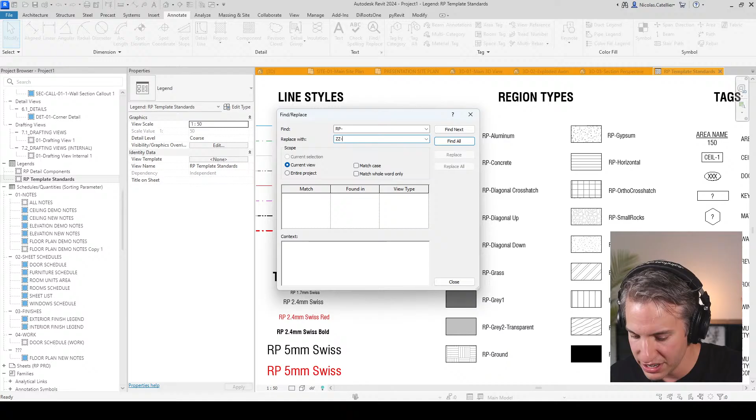And I would probably, there's a find and replace somewhere. Find and replace, I can search for RP dash and replace by ZZ dash. Find all and replace all. You can see all of these texts have been replaced as well. And even though this says RP, if I look there, it's ZZ now.

Good, so I think I went through the whole thing. I don't want this to be informational, I just put all the information about it. You can just use the concept to build your own template.